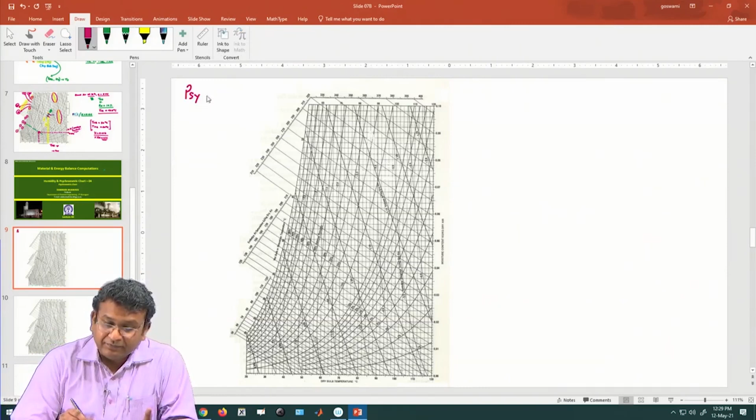Okay. So, with that I start the last lecture, and all of you who have been following this class rigorously should now not have any difficulty in understanding this rather complicated looking graph, which we now know is the psychrometric chart. It is psychrometry. Please do take care that there is an R, which a lot of people tend to miss out.

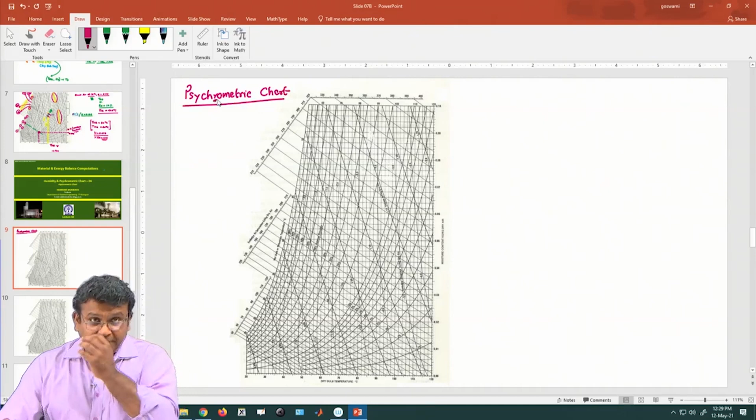Okay, so, now what are the things we know? The x axis is the dry bulb temperature, the y axis is the specific humidity, or the moisture content, and then some of the lines we understand. These inclined lines are the wet bulb lines, and at the end of each wet bulb line it is written 30, 20, 35, 40.

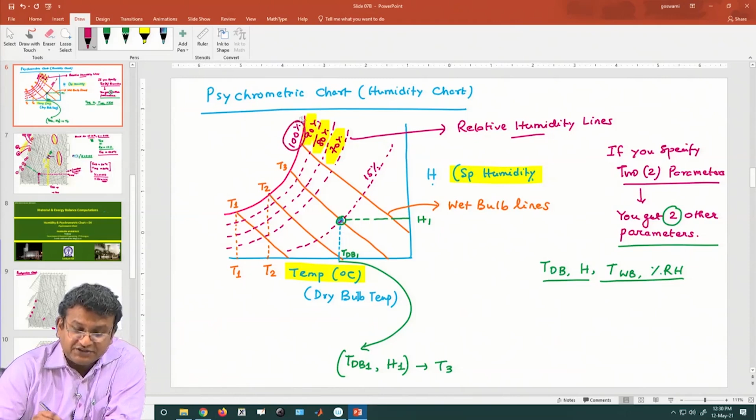So, these are the wet bulb temperatures, and in the previous lecture I told you that these two temperatures are the same, because this is the 100% saturation line. This is up to 90% and this is the saturation line. So, if this is 30 degrees, you go down and you see this is also 30 degrees, because at saturation the wet bulb temperature and the dry bulb temperature are the same.

So, we now understand four things. These are the wet bulb lines and the relative humidity, like 1%, 2%, then 10, 15, 20, 30, 40. But in addition to that, there are three other parameters which I highlighted. This parameter is enthalpy at saturation, kilojoule per kg dry air. So, let us mark this as 1.

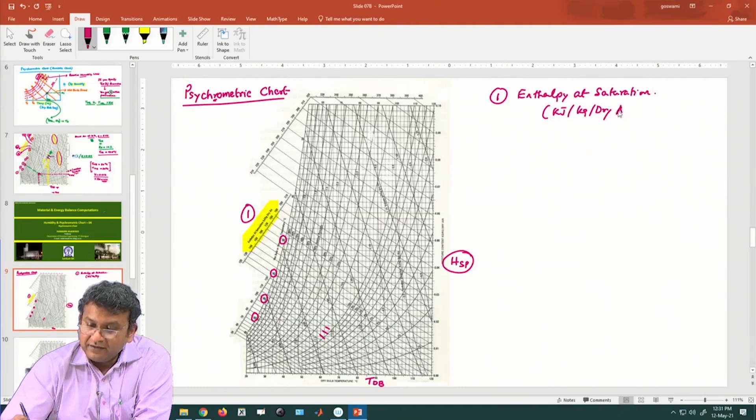This is enthalpy at saturation and the unit is kilojoule per kg dry air. So, if you have air, let us say this is the condition of your air, then you automatically can find out the enthalpy at saturation. Per kg of dry air, its enthalpy at saturation is 143 or 144; I cannot see that clearly, but you can find it out.

But then comes the question: if you have humid air which is not 100% saturated, you can't use it, because this is at saturation. So, there is something you can use, and for that you have this set of nearly vertical, but slightly curved lines. These are the third set of lines. There are three sets of lines.

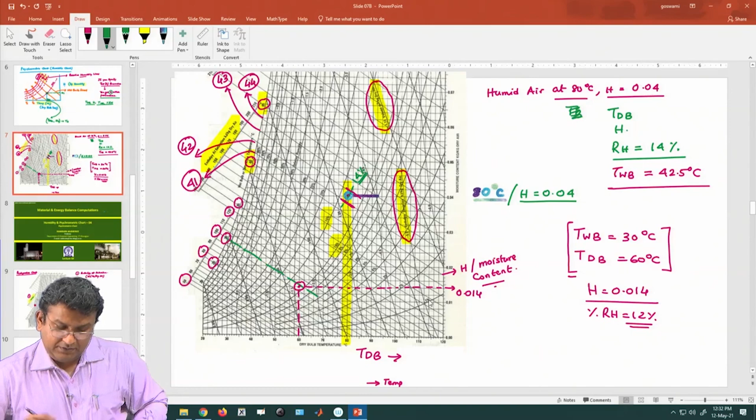These wet bulb lines we now know very well, but you see there are these nearly vertical, slightly curved lines, and of course, the x and y axis are the dry bulb and the specific humidity lines. And here you see what is written is enthalpy. Let me just see what exactly is the terminology they have used.

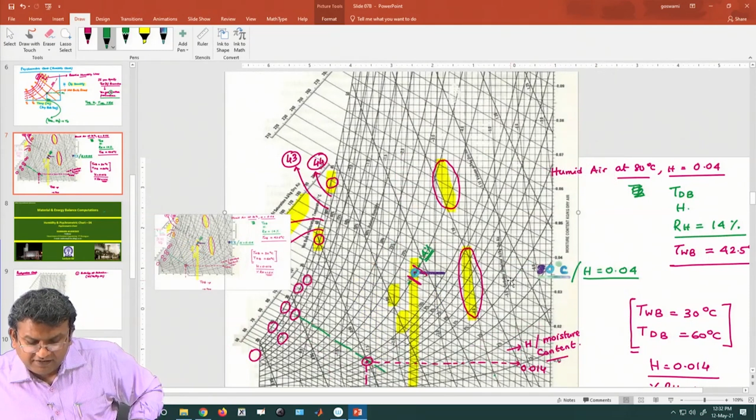It is enthalpy difference or something like that. So, what it means is some numbers are written over here. So, this is minus 4, this is minus 5, this is minus 4, this is minus 3, this is minus 2, this is minus 1, this is minus 1, this is minus 1.5 and things like that.

So, instead of being at saturation, let us say you have a condition over here. How do you find out its enthalpy? Enthalpy of this humid air you can find out. You find out the enthalpy at saturation, follow the wet bulb line, and from there you see on which enthalpy deviation line it lies, and you find that this is very close to the minus 1.5 line. So, this is the minus 2 line.

So, now what you can say is the enthalpy of the unsaturated air, whatever that is, based on this condition, and the condition also you can find out. So, this has specific humidity of 0.0305 and dry bulb temperature of 58 degrees centigrade. That is the point.

So, you can straight away say that its relative humidity is 25%, its wet bulb temperature is 37 degrees centigrade, but in addition to that you can also say its enthalpy is 143 minus 1.5, that is 141.5 kilojoule per kg dry air.

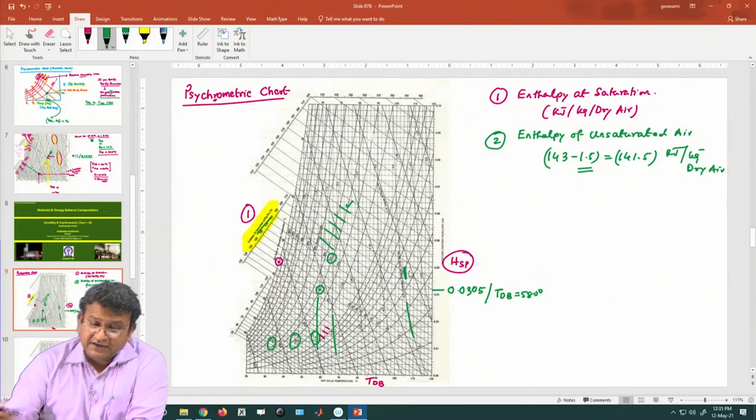The third set of lines is these lines, where you have these numbers 1.15, 1.20, 1.10, 1.05, then you have 1, then 0.95 and things like that. This is a third set of lines. These are also slanted lines, but at a much higher slope as compared to the wet bulb lines.

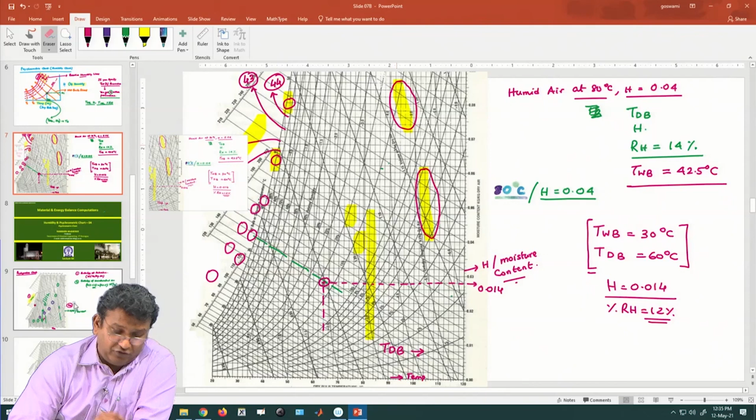And these lines are, as you can see over here in this magnified version, volume; these are the humid volume essentially. So, this is the volume of the humid air, meter cube per kg dry air, the specific volume or the humid volume. So, these are the third type of lines. This gives you the humid volume.

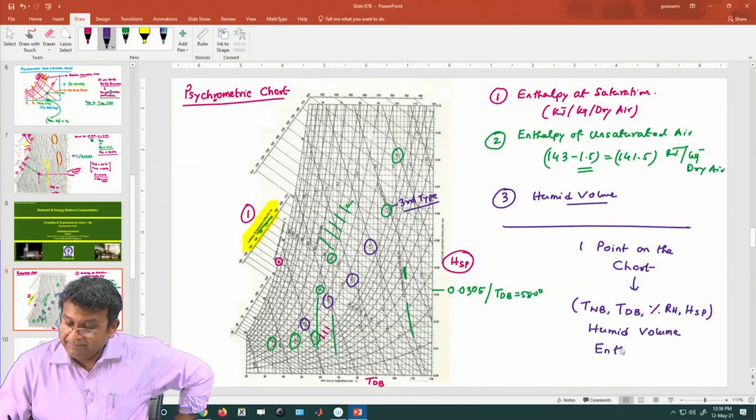So, if you can identify one point on the chart, from there you can get 4 different entities. So, firstly wet bulb, dry bulb, relative humidity, specific humidity, these 4 obviously. Then you also get humid volume and the enthalpy. So, these 6 terms; just look at one point and you get 4 more.

So, you can essentially have a combination of any 2 to locate a point on the psychrometric chart, and then the remaining 4 you can straight away find out. So, let us say we have a condition where the specific humidity is 0.02 and the relative humidity is 80%. Can you do that? So, here is the 0.02 and this is the 90%, 80% line. You need to locate it; of course, it becomes a little clumsy, but nonetheless.

So, here is the point: 0.02 is the specific humidity, and 80% is the relative humidity. So, straight away you can find out the dry bulb temperature, which is 28 degrees centigrade, and the wet bulb temperature is 26 degrees centigrade. Dry bulb and wet bulb temperatures very close to each other means that the system is very close to saturation. So, I hope now you can locate points on the psychrometric chart quite easily.

Now, let us quickly take up a few very interesting problems which you can also do on the psychrometric chart. So, let us say humid air with specific humidity 0.04 and 80 degree centigrade is cooled to 40 degree centigrade.

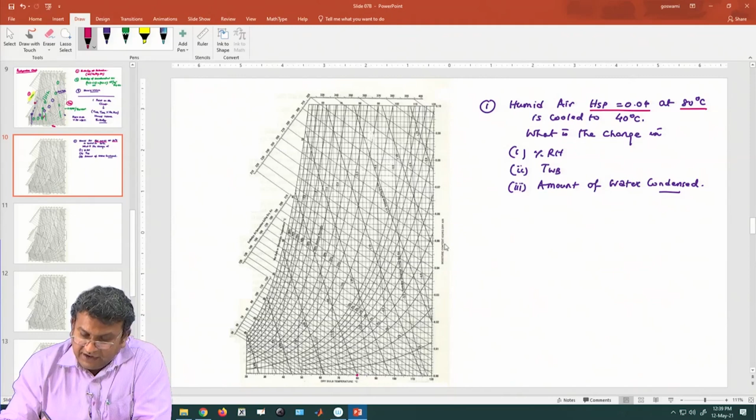What is specified is that the specific humidity is 0.04 and the dry bulb temperature is 80 degree centigrade. So, here is 80 degree centigrade and this is 0.04. So, you go like this. So, I guess this is the point. This is the initial point, let us mark it point 1.

So, we find initially the percentage RH is somewhere between 10 and 15%. So, let us say it is about 14%. The wet bulb temperature is somewhere between these two lines. So, it goes and hits here. So, it is 41, 42, 42.5.

And it is said that it is cooled to 40 degree centigrade and HSP remains at 0.04, or it is simply cooled to 40 degree centigrade. So, if you just say that you have simply cooled it to 40 degrees, what do you mean? It means that the dry bulb temperature has gone down. So, if the dry bulb temperature has gone down, this is the path it is going to follow, because this is in the direction of reduction of the dry bulb temperature, and you see that it hits 40 degree centigrade somewhere over here, right.

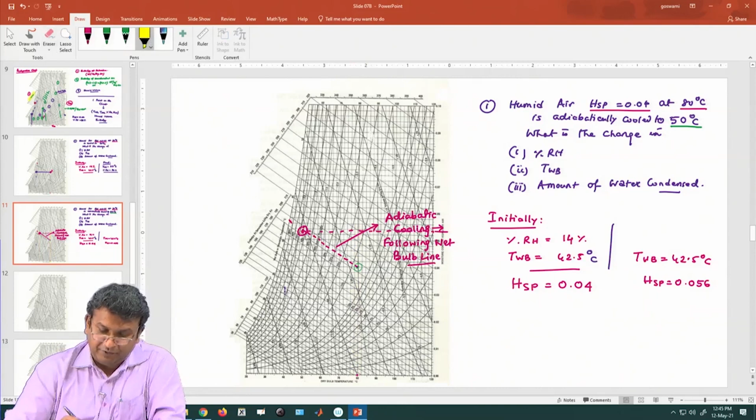I hope all of you have understood what is meant by adiabatic cooling. So, if it mentions that you have adiabatic cooling, you actually follow the corresponding wet bulb line, and then you can also find out what is the change in the humid volume, which you can all do. So, here there is actually no change in the wet bulb temperature, because you are following a wet bulb line, where the wet bulb temperature remains constant.

But what about the humidity? Humidity was initially at 14%, and here you can see that it has shot up to, let us say, 68%. So, this way you can draw a process on the psychrometric chart. About the third part of the question, again there is no question, because you have not attained saturation. Only when you attain saturation will the question of water condensing out be important. Since you have not attained saturation, there is no water condensing out. So, water condensing out is 0.

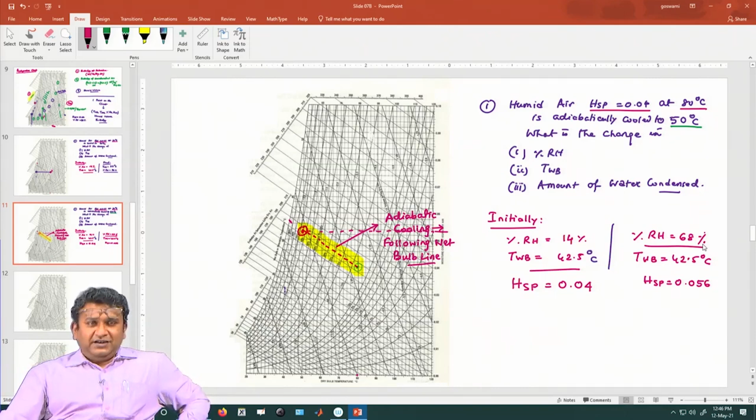We will immediately come to an example of when this thing happens. So, this is like normal cooling. This is how the normal cooling looks. You follow the same specific humidity. Specific humidity remains same, but as the temperature reduces, the water holding capacity of dry air progressively reduces, and that is why the relative humidity goes up. So, as temperature reduces, with the same amount of moisture present in the system, you are now closer and closer to saturation, and therefore the relative humidity goes up. This is how it looks.

Now, let us take another problem which is very close to the initial problem we looked into, and let us say now instead of 40 degrees centigrade, we are cooling to, let us say, 24 degrees centigrade. No adiabatic cooling, we are doing a normal cooling up to 24 degrees centigrade. Same initial condition; we could take different initial conditions, but on an online PPT this graph is a little clumsy, so I do not want to change the initial condition.

So, here we know this is the initial point. The initial point again we have located based on HSP equal to 0.04 and temperature equal to 80 degrees centigrade. So, based on that we know the initial humidity is 14% and the wet bulb temperature is 42.5 degrees centigrade. Now it says that it is cooled to 24 degrees centigrade. So, we know how to draw cooling now and we start drawing the line.

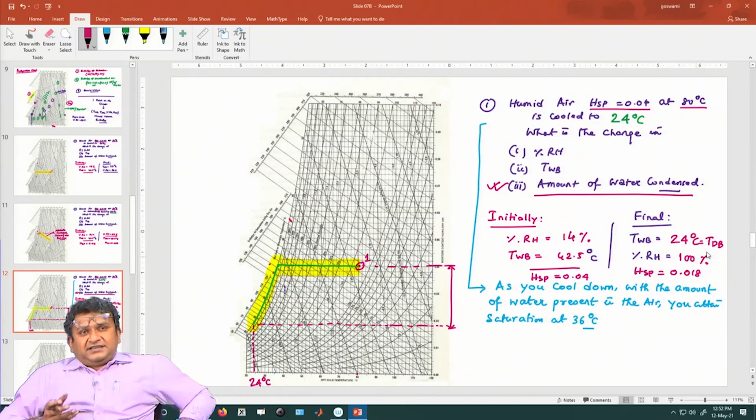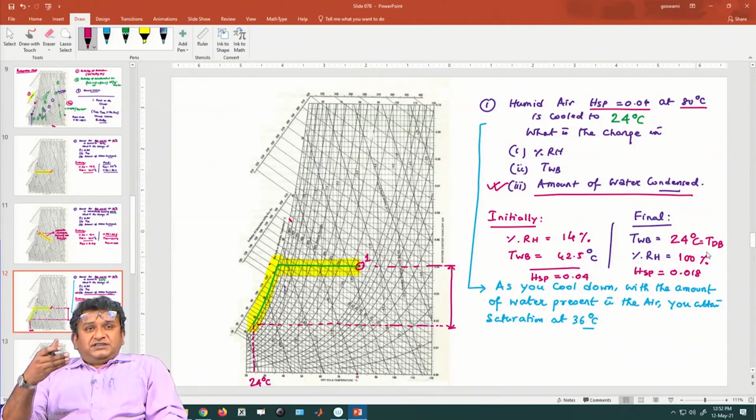This is exactly what happens. So, let us say you have 70% relative humidity air at daytime, and now at night because of the cooling, let us say the temperature drops from 30 degrees centigrade to 13 degrees centigrade. And so, maybe at a certain temperature, with whatever amount of moisture is present, it attains saturation, and if you now cool further, this additional amount of water that is condensing actually appears in the form of dew, and therefore, this particular point is the dew point.

So, for the dew point there is no curve or anything like that, but for a system like this, where the cooling is associated with attainment of saturation, you can locate the dew point also.

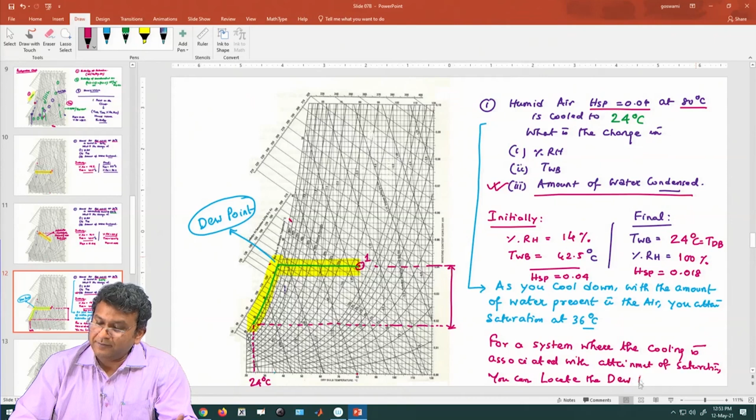Of course, I gave 3 representative problems. You can also in principle have a system where you do adiabatic cooling to such a temperature that you attain saturation, and in that case the graph will look like this. So, adiabatic cooling is only possible until saturation is attained, because after that you cannot have adiabatic cooling. The moment it condenses out, there is actually net transfer of heat.

So, if somebody asks you how far you can do adiabatic cooling, you can go only up to the level of 100% relative humidity. Please do understand that this part of the curve will not be present, this will not be adiabatic. So, in adiabatic cooling you can go only up like this, following a wet bulb temperature.

The other thing which I am not emphasizing, which I request all of you, and this graph I will tell the NPTEL team to share with all of you as course material: any point you locate, you can also find out the other parameters, the enthalpy at saturation, the actual enthalpy and humid volume. So, this needs a little bit of practice.

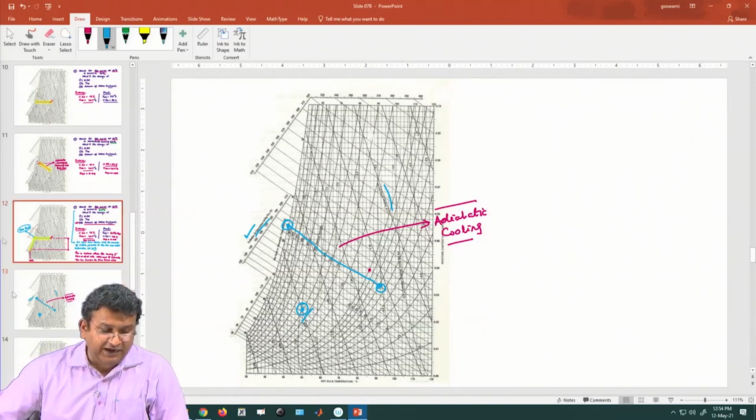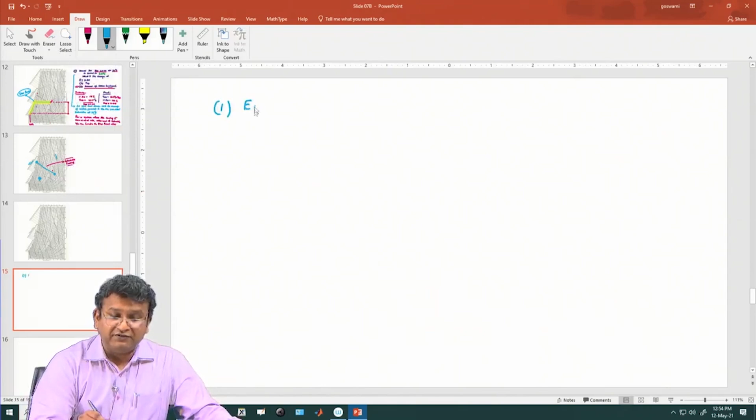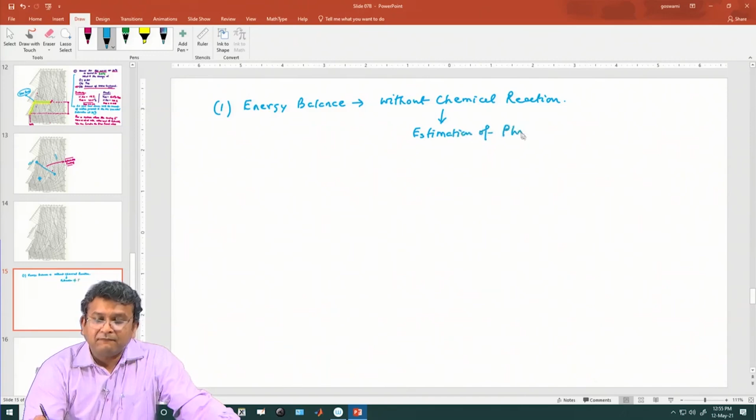So, that brings us to the end of this particular course. But more than that, what are the things we have learned? We have essentially learned energy balance, the basic pedagogy, the terminologies, what is a system, and so on. First we learned energy balance without chemical reactions. And one important thing we learned here is estimation of parameters. Because many of you will say, sir, after doing all this we have just done MCP(T2 − T1), or MCP dT integrated from T1 to T2. But this course has also taught you how to estimate CP in certain cases.

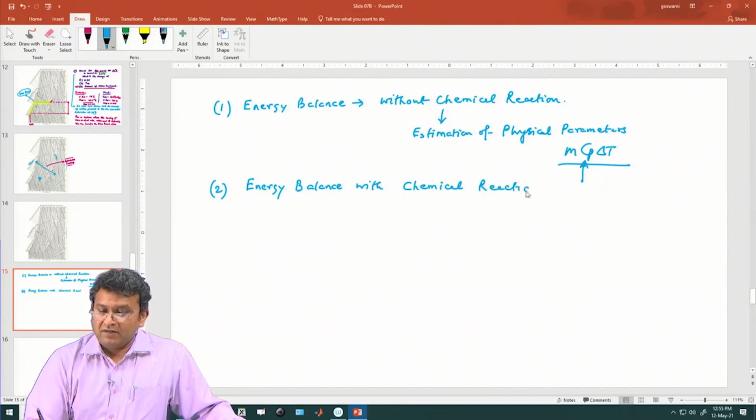In the next part of the course, we learnt about thermochemistry, so energy balance with chemical reactions. And while handling energy balance without chemical reactions, you probably have learnt rather well how to handle the steam table. And please remember, as a last warning as I end this course today, steam is not an ideal gas under any circumstances. So, please do not get tempted to use PV = nRT for steam, it is not an ideal gas.

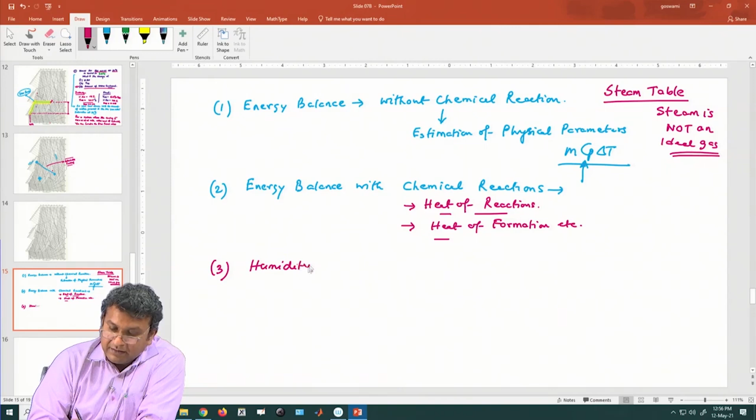So, then we learnt about energy balance with chemical reactions, and we learned some nice concepts like heat of reaction. Of course, one thing we have not talked about is activation energy, which is fine. So, heat of reaction, and then terminologies like heat of formation, etc. And the third thing we learnt is essentially the concept of humidity and how to handle different forms of humidity, the concept of saturation,

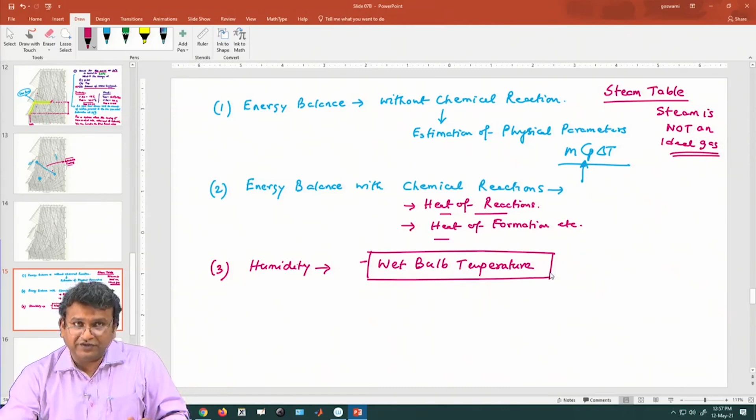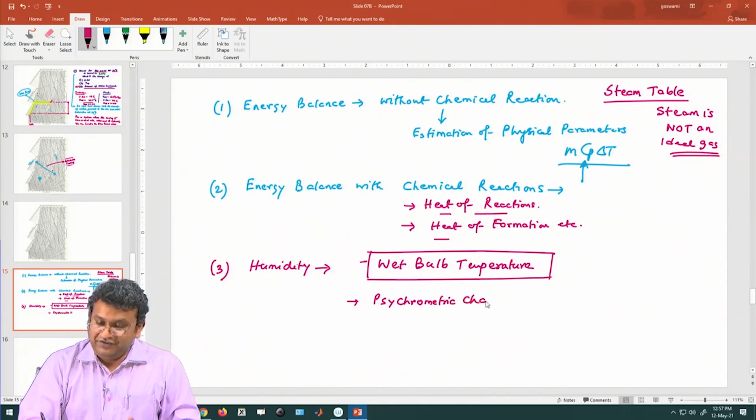and most importantly, the wet bulb temperature. In mass transfer particularly, you will realize that if you understand wet bulb temperature, how it is measured, what it is, you actually understand quite a bit of very intricate phenomena, because it is not that easy to visualize the condition under which wet bulb temperature can be measured. Of course, this is a preliminary course and I have taught it in that manner. And then finally, we learnt how to handle the psychrometric chart, which is my personal favorite, because you can have so much fun with it, including locating processes.